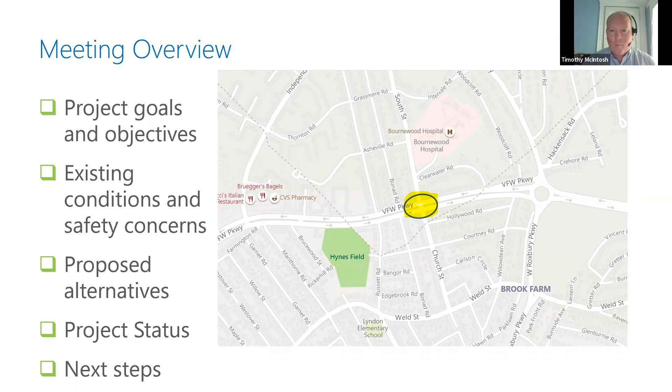The locus map is shown on the right. Most folks attending this meeting, I'm sure, are very familiar with this location. Our meeting overview is on the left, and I plan to spend the next 15 minutes or so talking about the goals and objectives of the project, which Jeff actually just highlighted pretty eloquently. But I think it's important to talk about the existing conditions and some of the safety concerns. Probably the main event here is to talk and walk through the 3 alternatives that have been developed to date. I'll give you a project status and we can talk a little bit about next steps.

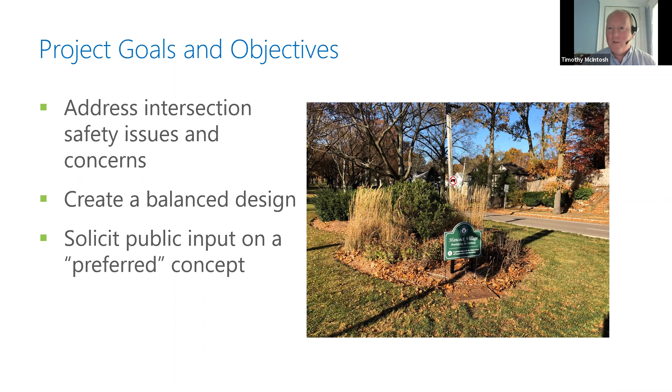So the goals and objectives: we're primarily here to address an intersection safety issue and several issues related to safety concerns. As Jeff mentioned, we are focused on trying to address those, but also to create a balanced design. We'll talk a little bit about what I mean by that when we walk through the 3 alternatives. Certainly your input is important. Ideally, we would get some information here tonight and maybe get a sense of what the preferred concept may be, so that we can start thinking about moving towards final design.

The next series of slides talk about existing conditions. For those folks familiar with this location, this is probably obvious. In the spirit of full disclosure, I'm a West Roxbury resident, so I'm very familiar with the location and the parkway in general, its historic nature, and the mature trees that Jeff mentioned.

As a civil engineer, we looked at the pavement. It's in pretty good condition, so that's a positive here.

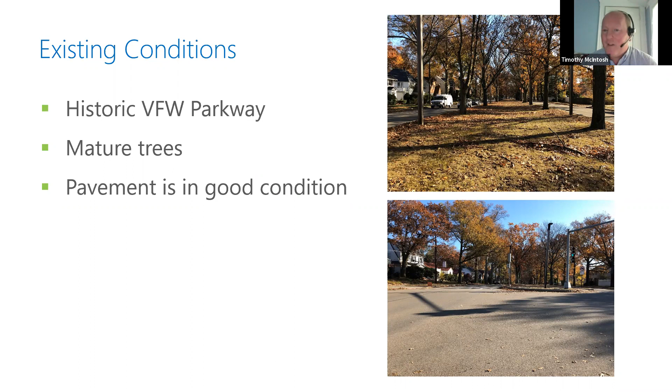VFW Parkway is 2 lanes in each direction for eastbound and westbound. The photo on top gives you a good snapshot of those, including the bike lane. There are existing bike lanes on the parkway. South Street and Church Street - South Street being to the north, and Church Street, which is actually in West Roxbury, just to the south - are 1 lane in each direction. The traffic signal system, as you'll see throughout the presentation, is outdated and antiquated. And the pedestrian amenities on all 4 corners are not compliant, so they need to be upgraded to bring those back into compliance.

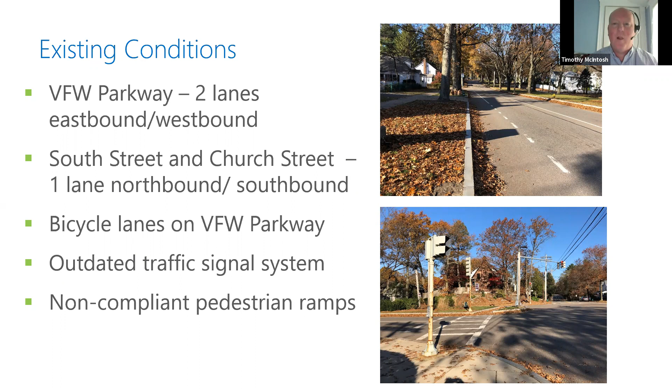So this is just a plan view of the existing conditions. We have a full topographic survey that's been completed, including right-of-way and property information. So we have all the information we need to prepare the design and advance it, and we've used this to develop these alternatives. It may be a little difficult to see for those not used to looking at a plan, but you can see the wide median right down the middle - about 40 feet - with the 2 lanes in each direction on VFW Parkway. And you can see South Street and Church Street on the bottom half of the plan.

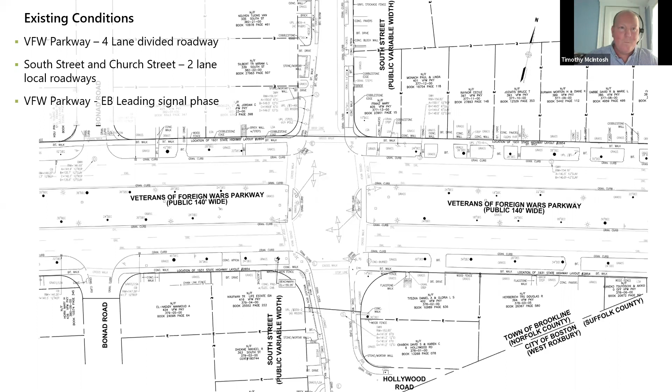The safety concerns certainly are evident. We have accident data from 2015 to 2017 - that's what's available. We expect the 2018 accident data will be available relatively soon, but it's not quite available yet. Over that 3-year period, there have been 22 reported crashes, about 7 per year. Of those 22, 14 were angle type or side swipe type accidents. What that means to us when we look at this is there's a red flag - it's indicative of a potential traffic signal phasing issue or perhaps a geometric issue. So that certainly caught our attention.

And tragically, there was a fatality in April of 2017. That's really why we're here today, to think about how that happened and ways to try to avoid that in the future. This intersection - the question might be, how does it compare to other intersections in the state?

There's something called crash rates. For this particular area, which is Brookline, the greater Boston area, that's in the Mass DOT District 6 area. This intersection's crash rate is slightly higher than that district average, but statewide, it's actually a little bit lower than the statewide average. Nonetheless, there are safety issues here that need to be addressed.

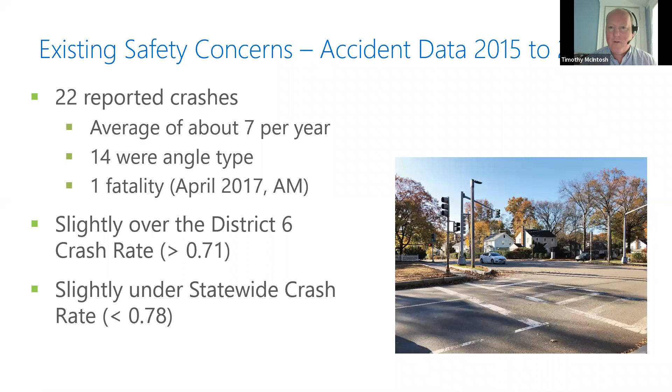The next couple of slides, I'm going to walk through, hopefully very simply, how the current traffic signal operates, because I think it's important to better understand the kinds of changes we'd like to make. For those of you who travel through this intersection, you're probably familiar with this, but this first image shows the green arrows in the lower left-hand corner.

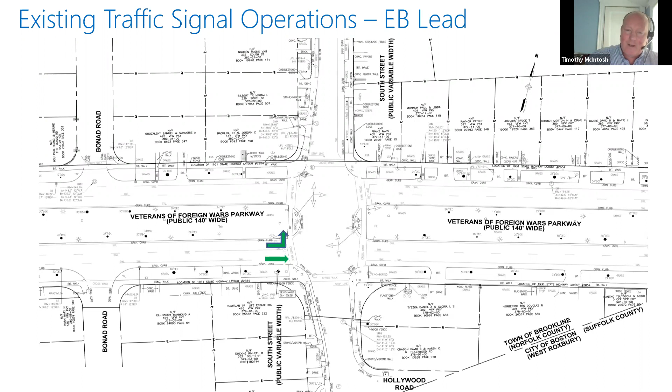This is called a lead phase. If you're traveling eastbound, heading towards the rotary, you'll see a green light and can proceed through the intersection, or you'll see a green arrow and can make a left turn. Everything else is stopped at this point.

In the next phase, the green arrow that allows you to go left turns off, and the green ball remains. You can still proceed eastbound and westbound and make a left turn in either direction, but now you have to wait for a gap in traffic to safely make that maneuver.

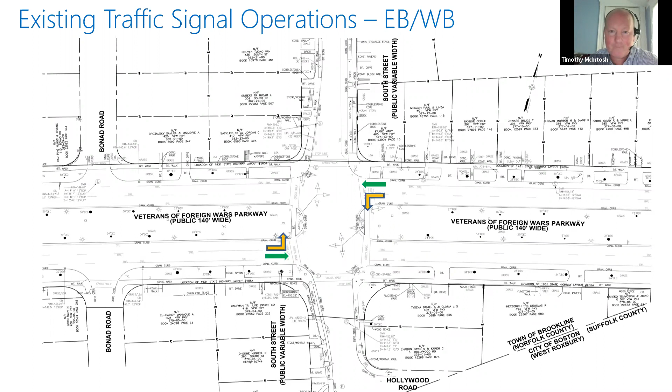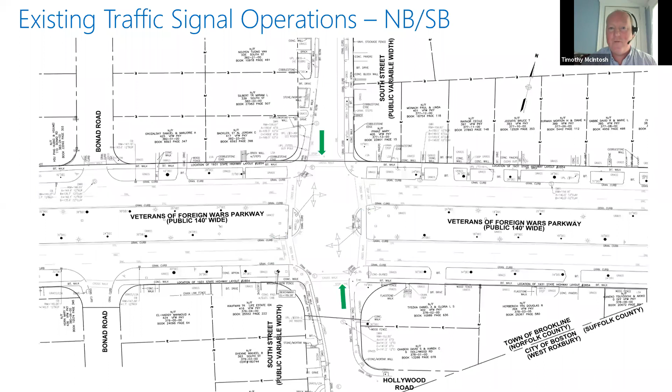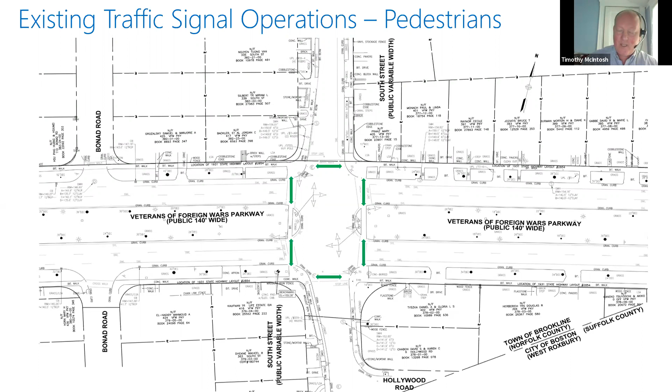So let's talk about the proposed alternatives. We'll walk through three alternatives, but it's important to state up front that all three will share some common features.

For example, the traffic signal controller and the traffic signal system itself are being proposed to be totally reconstructed and replaced, including new overhead mast arms. For those who may not know, the photo in the upper right-hand corner shows the existing mast arm, and it's important to note there's only one signal head—that's what you see when you pull up to the intersection today.

The pedestrian signal heads, which you can't really see in this photo, will all be replaced with countdown timers. In all of the options, the pedestrian amenities—the curb ramps on all four corners, including the median cut-throughs to accommodate pedestrians—will be reconstructed and made compliant with current standards.

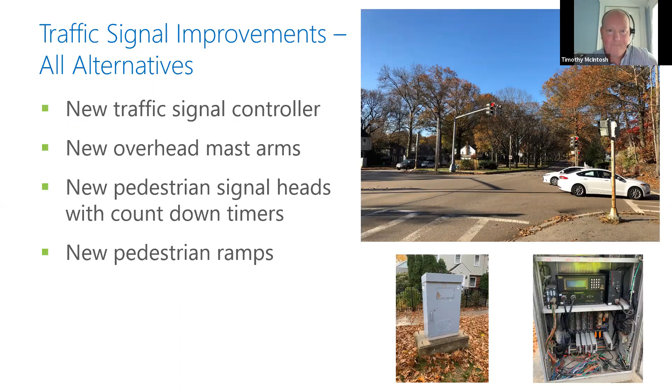Okay, so this is alternative one. The plan view shows that we are maintaining two vehicle lanes on VFW Parkway in each direction, similar to how the intersection operates today.

You can see we've laid out the new traffic signal system—that's what these pointy arrows indicate, the new signal layout. We'll have overhead mast arms, and the main difference is we're going to have two signal heads in all directions for better visibility and improved safety. The signal will operate similarly to today, but optimized.

The pedestrian time will be optimized to allow for safe crossing, and the vehicle times will be optimized to allow all the maneuvers you currently have today. Some benefits here: we're not impacting any trees in this option, we're improving pedestrian conditions, and we're maintaining the bike lanes on VFW Parkway.

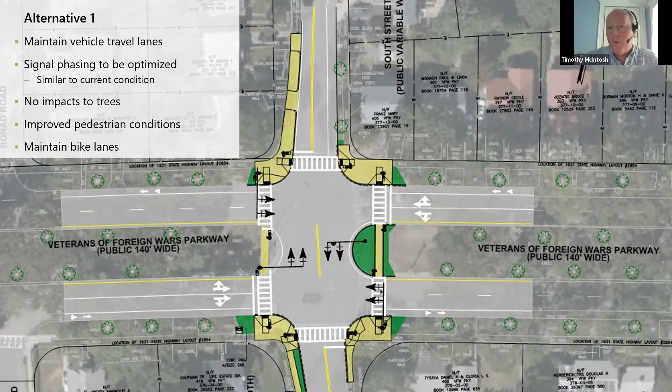So that's alternative one. It's not included in these bullets, but this option is probably the simplest to finalize in design, and probably one of the more straightforward ones to construct.

This is alternative two, and this option is a little more complicated. Again, we're maintaining two travel lanes on VFW Parkway in both the eastbound and westbound directions. However, in this option, we're widening into the existing median to create two exclusive left turn lanes.

The traffic signal operation will work a little differently than today. Each of those left turn lanes will have its own signal phase because, as Jeff alluded to, that median in the middle sometimes presents a challenge for opposing left turn lanes, so we need to give them their own phase. The bike lanes on VFW Parkway are maintained, and as with option one and all options, pedestrian conditions are improved. I'll zoom out on this alternative in the next slide.

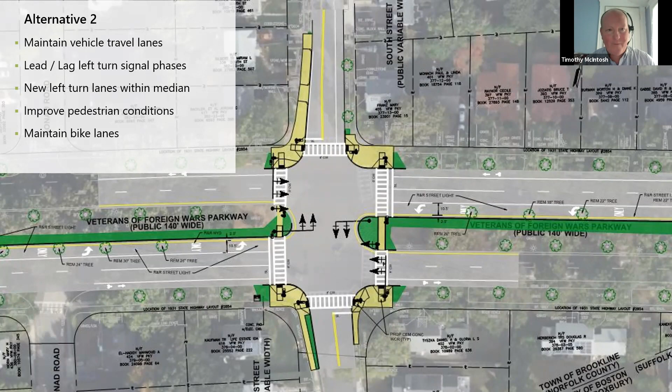This is the same alternative two, but it shows the bigger picture. These are some of the drawbacks, or trade-offs, for this particular option—where we're cutting into the existing median, we are impacting existing trees.

There are up to 16 trees that get impacted based on this layout. These exclusive left turn lanes have been designed to accommodate the turning traffic and deceleration into the lanes, to provide a safe facility. The project limits are much more extended compared to option 1, and because of the tree impacts, additional permitting would be needed, which will lengthen the design duration. Because the limits are longer and construction is more complicated with the median widening, the construction duration would be longer. That's alternative 2. The benefit I didn't mention is that you do have protected left turn pockets, so there's a safety benefit to that.

Moving on to alternative 3. This one is a little different than the second one you saw. It eliminates one of the travel lanes in each direction and replaces it with an exclusive left turn lane. The good news is that in this option there are no impacts to the trees, we're improving pedestrian conditions, and we're maintaining the bike lanes. But again, as with each of these designs, there are benefits and drawbacks.

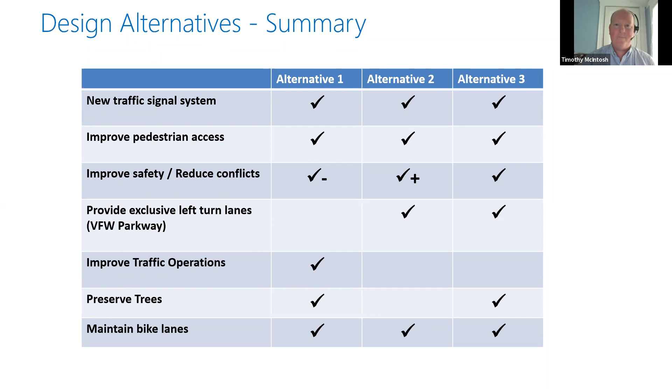So where are we today? As I mentioned, we have completed the field survey. We've prepared a draft traffic memorandum, which has been submitted to DCR, that summarizes these options. And obviously tonight we are presenting these options at a fairly high level. The hope is to have a discussion, get some input, and hopefully start to get a consensus on which option to move forward.

The next steps: you'll have the opportunity to review and make written comments on the presentation. The design schedule depends somewhat on which alternative moves forward. One option is a little more straightforward than, say, the option that may require permits for tree removals, and that will affect the schedule for final design. Once the final design is complete, we'll get into the advertisement and bidding process, and then into construction.

So I'll turn it back over to Dan for this last slide here.

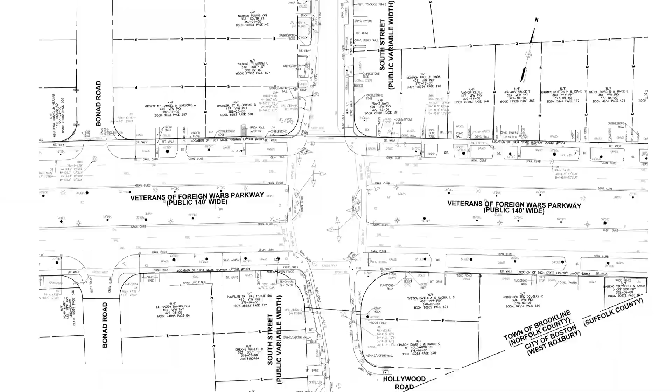So I'm not a fan of any of your options right now. I like Pete's comment, why are all the other intersections set up with a third lane? Why was our intersection left off of the third lane, the left lane? Why didn't that happen to this intersection? That's what I think needs to happen. We need that left turn lane like all the other intersections.

So you're getting 22 years of a lot of frustration right here. So I would question the bike lane being moved to a safer place, because that intersection is horrible. And painting the middle line, and I'll just repeat myself, putting up posts on that corner could save a few pedestrians from the sheer panic they have, just waiting for the light to change.

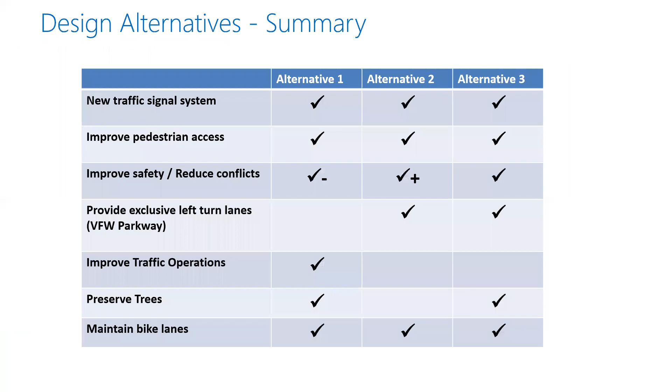I'm going to let Tim and Jeff address some of them now, and appreciate your voice on the alternatives that we have. I do want to mention that one of the alternatives, alternative 2, does provide that extra lane we were discussing. I understand you were talking about Pete's suggestion about the rest of the Parkway, but there is an alternative that does talk about the implications of extending the lanes and what that would do. But I'll let Tim and Jeff talk a little more.

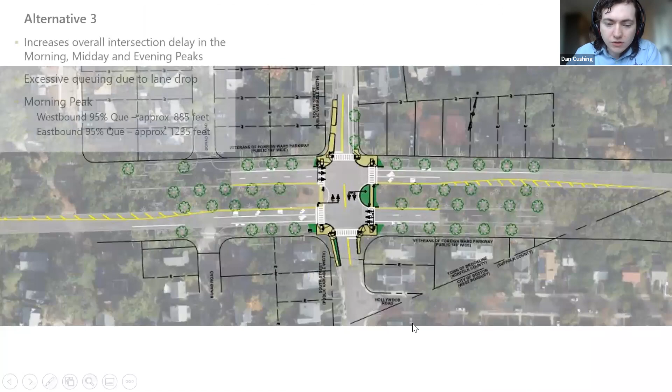It does, but it makes it go to one lane versus 2 lanes. So just to jump in and address that, I think Dan was talking about alternative 2, which is shown on the screen. It maintains the 2 travel lanes in each direction. It maintains the on-road bike lane, but it does carve into the median exclusive left turn lanes. And that has an impact to trees. I know, trees. My children's life.

I think I'm probably taking these questions out of order, but I think this existing conditions plan might help. You mentioned the wide sidewalks on both sides. I think really the sidewalk itself, a combination of concrete sidewalk and asphalt depending on where you are, isn't very wide, probably 6 feet-ish, maybe 8 feet. What's wide is that we've got a pretty healthy grass area in pretty much all locations with pretty healthy mature trees. One of the things we'd need to carefully consider, if we were trying to make that sidewalk wider, maybe more like a shared use path, is the tree roots.

Jeff was mentioning earlier tree roots as it related to trees within the median, but the trees on these outside edges are equally as mature and would need to be considered if we were considering doing any kind of widening of the actual physical concrete or asphalt walkway. We'd need to think about that.

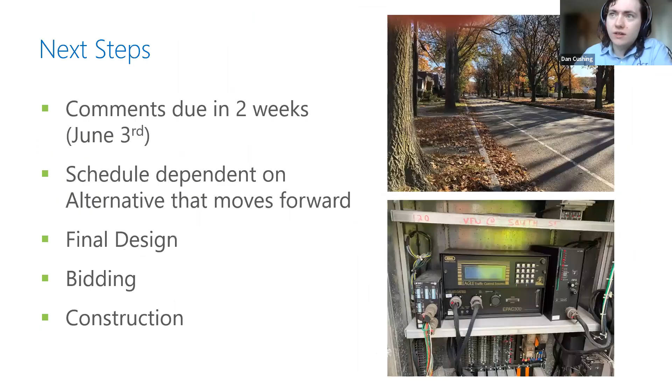Thanks, Jeff. Thanks, Tim. I'm going to move over to the Q&A again, to David's post here. A question about alternative 2: do you have any information on whether new trees can be planted in the median post-construction? If so, how many years might they need to grow to maturity? Thank you.

Let's see, raise your hand on the panel if you're a tree expert. We do not have our landscape experts here tonight. I do know we routinely plant trees as part of our civil engineering projects like this. We can certainly do that as part of this project.

However, I will not pretend to be able to tell you how fast trees grow. One thing I know is that it takes a long time for a tree to reach the size of the trees we have on the median today, and even on the side—so many years, possibly decades. The biggest tree you can plant is still pretty small, and even then you have to hope the tree survives the first few years of its life. So the trade-off we're talking about—I wouldn't say trading an old tree for a new tree is an even trade at all, if we decide to remove the mature trees, or some mature trees.

So we would have to consider that trade-off to be a negative in terms of any tree removal. The trees in the median area that would be impacted vary in diameter—the smallest I can see is 18-inch diameter, which is pretty massive, and the largest in the general area is maybe as much as 3 feet in diameter. These are very old trees, and it would take a very long time for a new tree, maybe a 3 to 4-inch caliper tree, which is actually considered large when planting, to grow to that size.

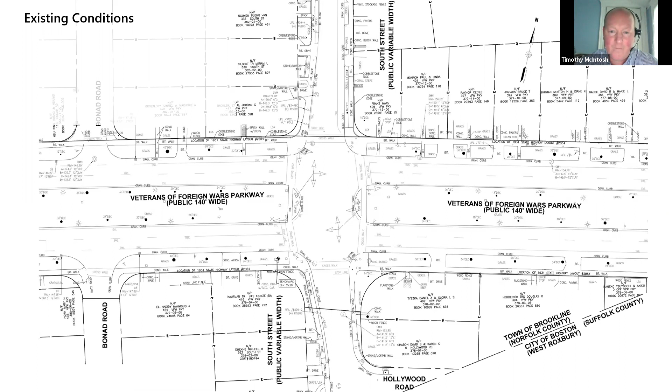In addition, the reason guardrails work is because they're long. They're strong because the individual steel posts that line the guardrail hold up the other ones along the line. Picture a line of people holding hands at arm's length, like the game Red Rover - when someone's sent over, it's difficult to break through the line because all those hands are held together. But if there's only 3 people, it's much easier to get past. If you have a short section of guardrail on a corner with only 2 posts and there's an impact, that entire assembly will flop over because there's nothing on the ends holding it together. That's why guardrail is generally very long.

You do see short sections of guardrail from time to time, and I suppose we could do it here. As Tim said, we have to leave openings for the wheelchair ramps - that's not an option. We can put short sections of guardrails up, but like the concrete bollard conversation we had earlier, in that small application they wouldn't be very effective in preventing or absorbing the impact of a collision.

I think the collisions we're talking about that enter onto the sidewalk or private property are almost always the result of an angle crash that Tim described before. For this intersection, we talked about the width of the median, which is a negative in terms of collisions. Angle crashes happen when a vehicle turns left off the Parkway against another one going through - that's an angle crash that can happen at high speeds. Or if a vehicle from the side street going straight collides with a vehicle from the Parkway, which could happen when one runs a red light or runs at the end of the yellow, and there's a collision there.

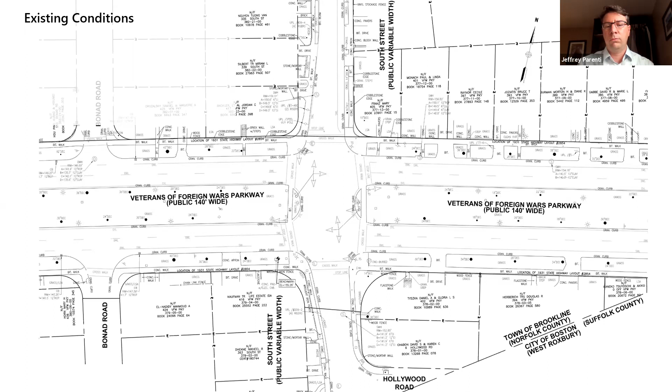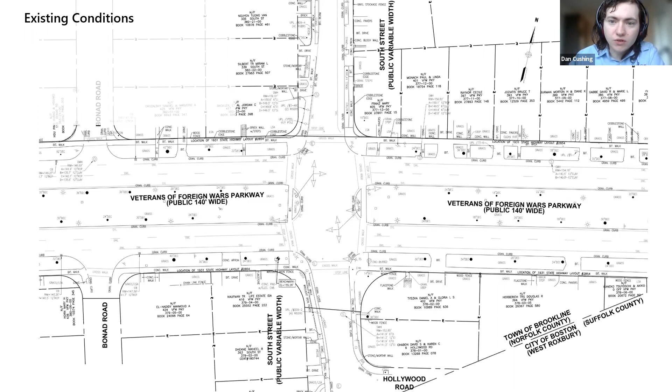Thanks again for that answer, guys, helpful information. Those angled crashes sound like, if we can help prevent those from occurring to begin with, we can prevent a lot of the need for some of these structures. But thanks again for the answer. I'm going to move over to the chat - Tim, do you think you could run through alternative 3 again? We have George in the chat requesting we go over that one more time.

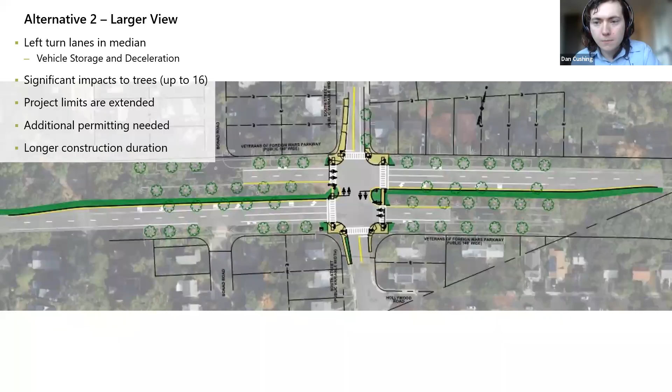Certainly. So alternative 3, this is the enlarged version, focusing on the intersection. In the immediate intersection, you can see the lane use on the Parkway consists of a left turn lane in the westbound direction, a left turn lane in the eastbound direction, and then essentially a through lane in each direction, where you can make a right turn from that through lane. But what we're doing is dropping one of the through lanes and replacing it with the left turn lane.

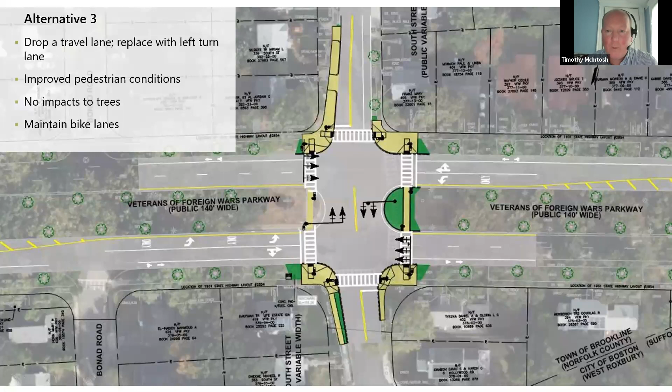No impact to trees, maintaining the bike lanes on the Parkway. When we move to the enlarged version, you can see how we develop that, with these yellow lines called gore areas. As Jeff mentioned, we're not changing the curb line of the median, but we're adding pavement markings, called gore markings.

That's how we bring two lanes on the far right-hand side of the screen over about a 300-foot distance down to one lane, at the widest point of those yellow gore lines. Then it starts to open back up so a vehicle can choose to stay in the through lane and either go through or make a right, or can decide to enter the left turn lane and make left turns with assistance of the traffic signal phasing.

So some of the trade-offs with this scenario is that you do have additional delay in the intersection, and some additional queuing and backups in each direction. But as Jeff mentioned, this would serve to slow traffic down because of the merge, so that may be considered a benefit. I didn't talk about all the specific things, but there's also the double yellow line in the middle of the intersection, which we'd be proposing in all scenarios. That would help channelize folks coming through the intersection. I think that's an important addition to all of the concepts.

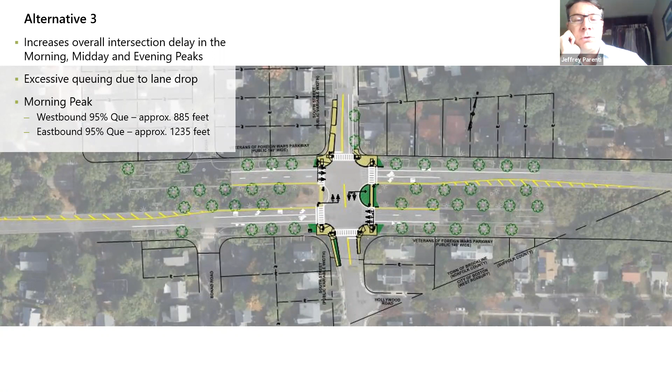Tim's right, if we put an island in there, it would be really small. We could also think about some kind of flush material. We were talking earlier about scored concrete or even a cobblestone material with the yellow around it. We could consider that, but we'd have to talk through what the benefit would be versus the noise impact too, less with the scored concrete, more with the cobble. But as Tim said, we would also have to consider that for fire apparatus to get around the corner, they would need to be able to mount it.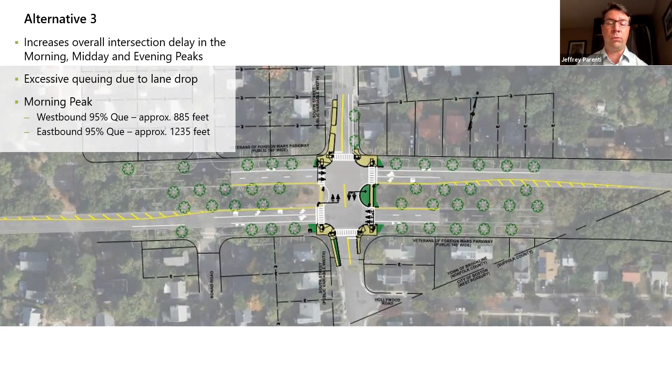So we wouldn't be able to do the 8 or 10 inch curb reveal that we have on the inside of the median, but it's worth talking about. That space in the middle is somewhat large, but we'll go through our options. The simple double yellow might be a little too simplistic for this application, and the design team can think through other options as a detail we do. It's common to all the options, so we can work through that during design development after we choose a preferred concept.